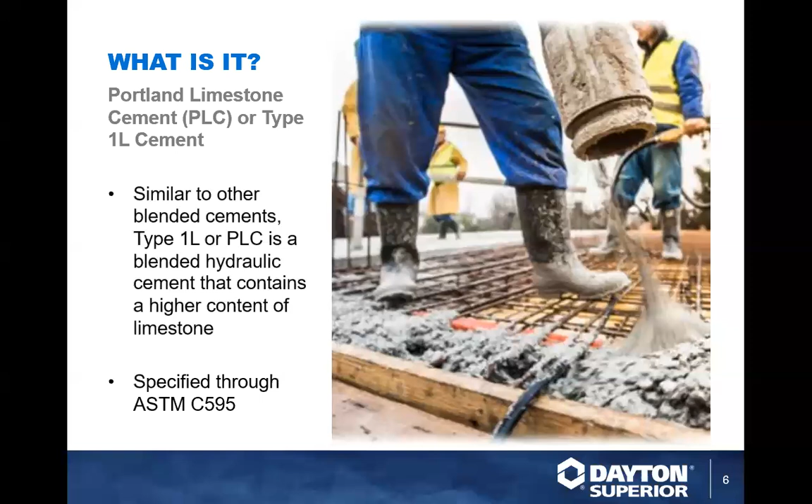As I mentioned, PLC is considered a blended cement, and it's not the only blended cement out there. Regular Portland cement, as specified under ASTM C150, can have up to 5% of the clinker replaced with an SCM, or supplementary cementitious material, that's going to exhibit those cementitious properties. Once we get past that 5% and into a range of up to 15%, we're looking at what's called blended cements. This can include Type 1L if you're using limestone, Type 1S if you're using slag, Type 1P if you're using pozzolan, or Type 1T, which is actually a ternary blend of all of those together.

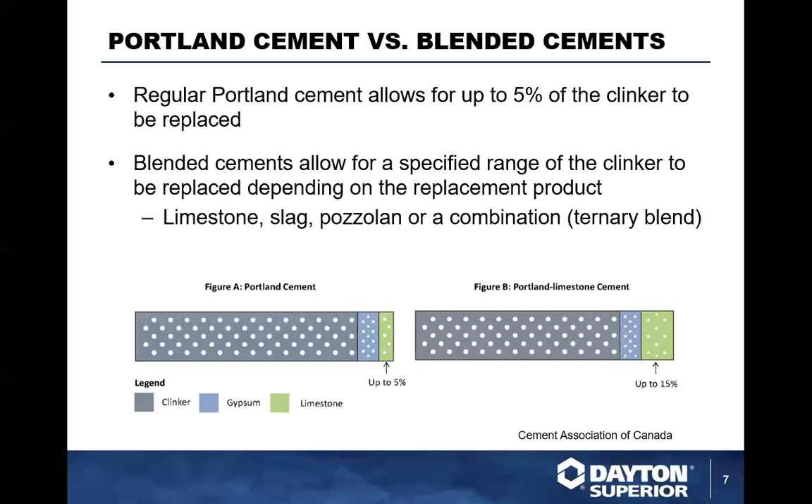So they're going to be defined by the clinker replacement, and that typical replacement range, at least for PLC, is anywhere from 5 to 15%. Generally, you're going to see 8 to 15%. So in that figure, you can see that the gypsum in the middle, the blue, is the same size. You're replacing that gray clinker with some more of that green limestone.

One of the biggest questions everyone is asking is why? Why are we being forced, quote unquote, to use Type 1L? So the main reason is how much better it is for the environment. By replacing Type 1-2 with Type 1L, we can generally reduce the carbon footprint of our concrete production by about 10%. So by using PLC, we're lowering the carbon dioxide emissions anywhere from 8 to 12%, so that 10% is the average per ton of cement produced, which over time can actually really greatly impact our global warming potential.

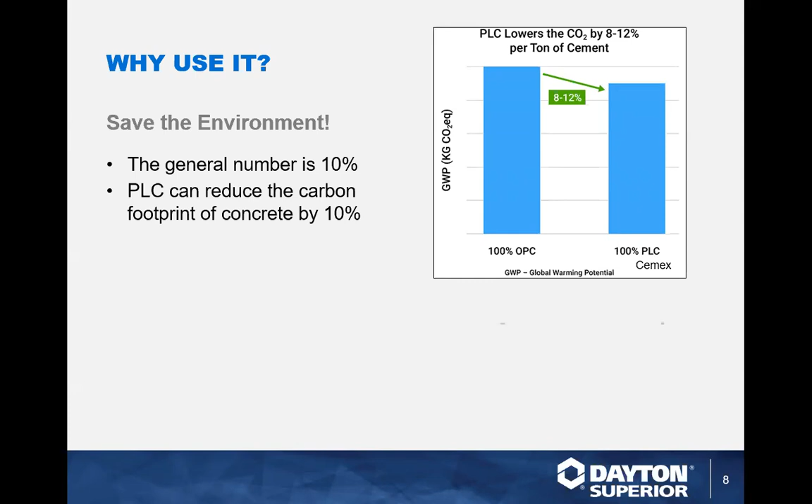Another reason for using Type 1L is that it's already globally used and accepted. It was adopted in Germany as early as 1965, and it's since spread across Europe and Canada. As you can see on the graphic, the entire US has accepted the use of Type 1L as of February 2024. This graph has slowly transitioned to all green as of this year. But just because the country has accepted it doesn't mean it's been an easy transition.

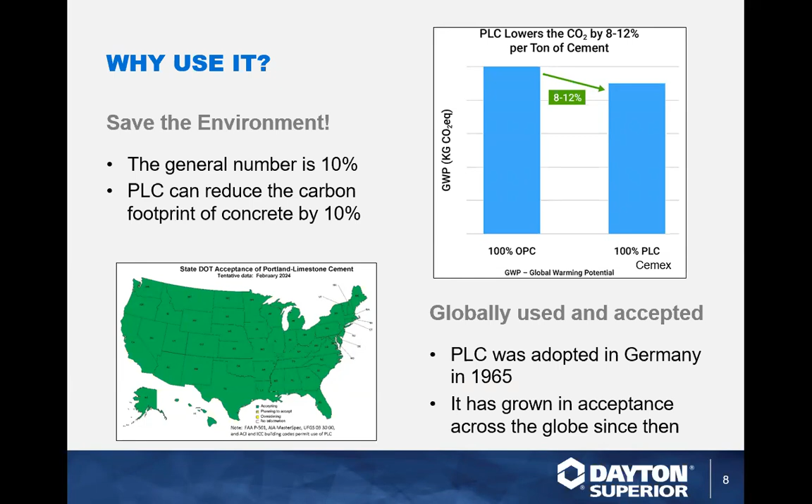So there have been various surveys conducted by multiple outfits on how users feel about Portland limestone cement and how it's affecting or not affecting their work. So why are we seeing that some crews are facing issues and others aren't?

First and foremost, not all PLC is created equally, which is a little scary. The limestone content can vary anywhere from 5 to 15%. The fineness of it can also differ based on how that manufacturer is going to grind that limestone down. And some mixtures actually contain admixtures or varying types of aggregate. All of that can change what you're seeing out in the field.

Some manufacturers are also a little bit more experienced. So if you've got a decorative crew, they're used to working with a variety of different batches, working with lots of SCMs, changes in batches, anything like that. So if you have a change from batch to batch, or you're just changing to Type 1L in general, these decorative crews that are used to using those different admixtures and aggregates are going to have less struggle when they're adjusting on the job.

Lastly, curing really does matter. It's extremely crucial to follow proper curing guidelines. Over time, we get comfortable in our jobs. We realize when certain things might be slipping that we need to tighten up on. So when working with PLC, it's important that the crews tighten up their curing techniques and closely follow the guidelines set by ACI for proper curing.

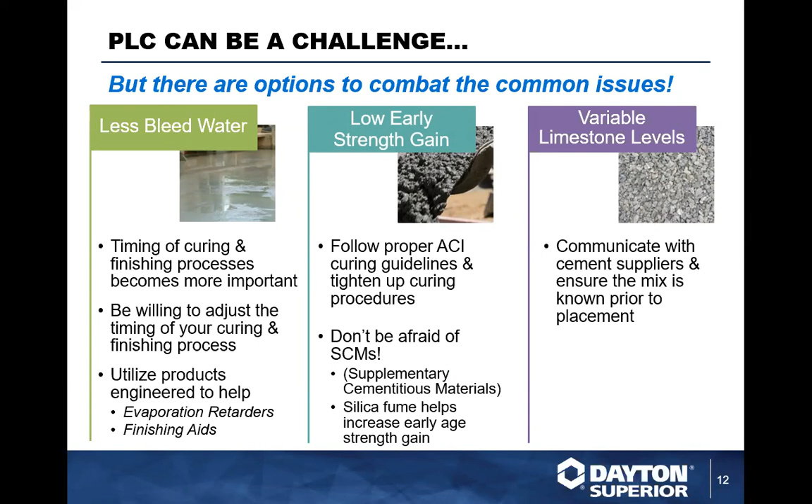Lastly, if you think you're getting variable limestone levels in your batches and no two batches are acting the same, you're seeing some really funky things on your job site, then try upping your communication with the cement supplier to ensure you know what mixes you're working with. There are consistent suppliers out there. Don't be hesitant to look - maybe there's someone else out there that you can get better, more consistent batches from. This also varies regionally. Different suppliers across the country are coming back with different mixes, so we're seeing a lot of variation across the country as a whole.

So it's possible by now you guys are sick of hearing about these magic chemicals meant to solve all your type 1L problems. Dayton talks about it, lots of people in the industry are talking about it. Well, I can't guarantee that they're magical, even though I think chemistry is magical, or that they'll solve all your problems. They can't hurt to try them. So we're going to talk a little bit about them today and how they can help.

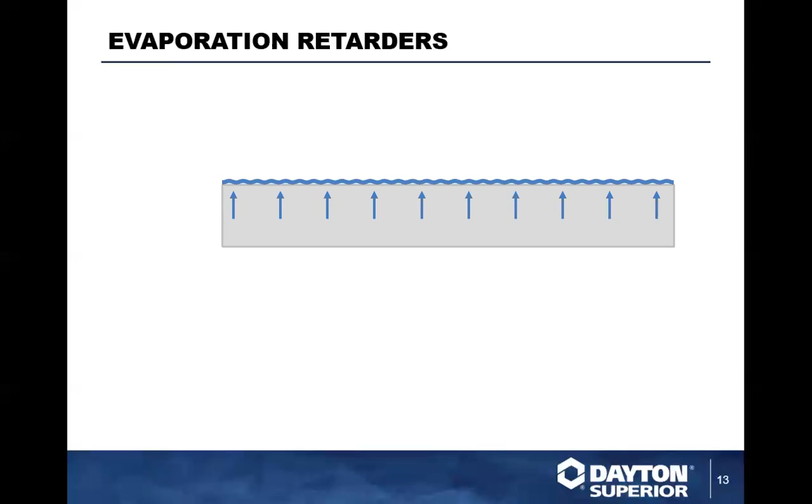The first product you can try to help maintain your bleed water is an evaporation retarder. So you're starting your job, you've got your concrete slab poured, and as everything's setting up, your bleed water is coming up to the surface. After your screeding process is complete, you're going to spray down your evaporation retarder. It's available in both a concentrate and ready to use. One of ours is yellow, hence the probably really difficult to see yellow on the screen.

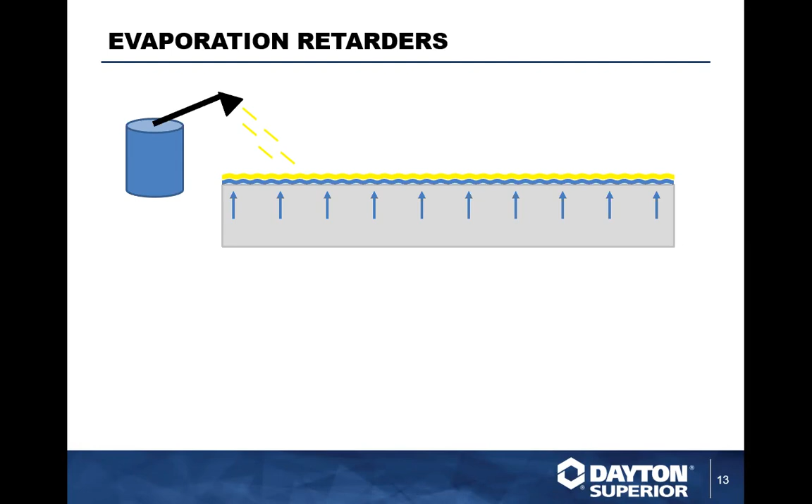The product's going to contain a long chain chemical, designed to form a water-insoluble waxy film. That long chain means it's forming that film without any space in between. That film is going to trap the bleed water on the surface, as you can see in the little picture. It's going to lock in that moisture, and allow the time you need to finish your slab before going back to finish it.

So if you're working with a huge slab, the weather conditions are pretty rough, and you're looking to keep as much bleed water as possible, which we know might be a little bit less with type 1L, you spray this evaporation retarder down as you're going through your slab. And as you come to finishing the end of your slab, by the time you're ready to actually start the finishing process, that film has kept that moisture in there.

So make sure that you're not working this into the surface. It's really important that you just spray it and leave it to do its job. Because the product does contain water, whether you're using ready to use or mixing the concentrate with water, if you work this into the surface, it's going to add water to your mix. That's going to change your water to cement ratio, which gives you a whole different slew of problems. We're already very sensitive with our water cement ratio with type 1L, so simply spray it on and leave it to do its job. Easy peasy.

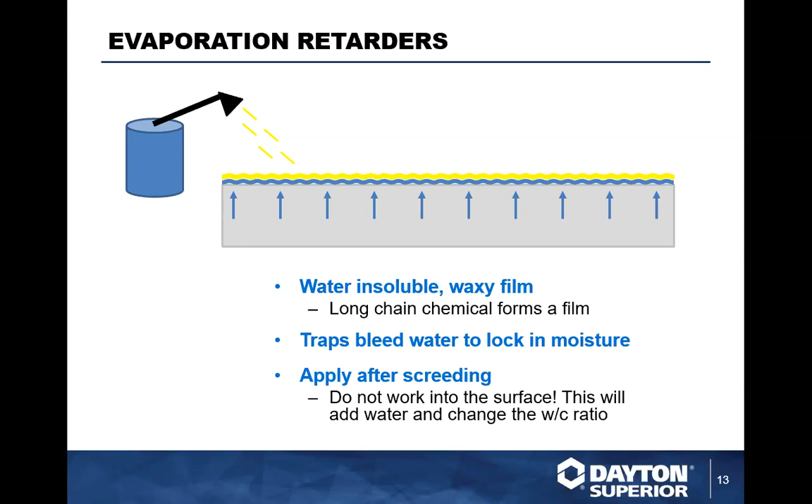Another option we have is to use a finishing aid during the floating and troweling step. As I mentioned, the evaporation retarder is after the screeding process; the finishing aid is during floating and troweling. Most finishing aids contain colloidal silica, which aids in cement hydration. So same as before, you have your concrete slab, which contains water and calcium hydroxide. You're going to spray that colloidal silica finishing aid on the surface of your concrete.

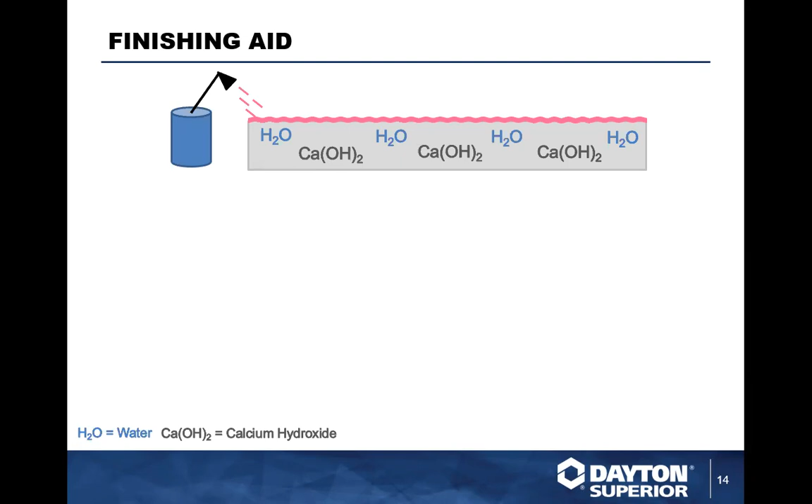This is where it starts to get a little different. After you spray that on, you're going to take your trowel, and this time work the product into the surface to ensure the silica mixes into the water and the calcium hydroxide in the slab. As that trowel goes across and mixes it into the surface, that silica is getting down into there, and after some fun chemistry, it's going to create calcium silica hydrate. So after that silica is worked into the slab, it reacts with the calcium hydroxide in what's called a pozzolanic reaction to form that CSH.

The CSH actually reduces your pore size and increases your strength. So if you remember when we talked about lower strength gain, one of the SCMs you can use to help with that is silica fume. It's similar here, where this colloidal silica helps fill in those pores by reacting and forming that calcium silica hydrate. It increases that strength. It can be great, but don't overuse your silica.

The finishing aid is also going to slow the evaporation. You can see it's kind of trapping that water in a little bit. It's not going to form a film, but it will slow it a little bit and therefore increase that pasty cream on the surface that allows for a nice smooth finish. So as you're working through your slab and you're seeing some tears and cracks as you're troweling over, you might want to consider adding finishing aid to keep that pasty cream up there to allow that process to happen without those tears.

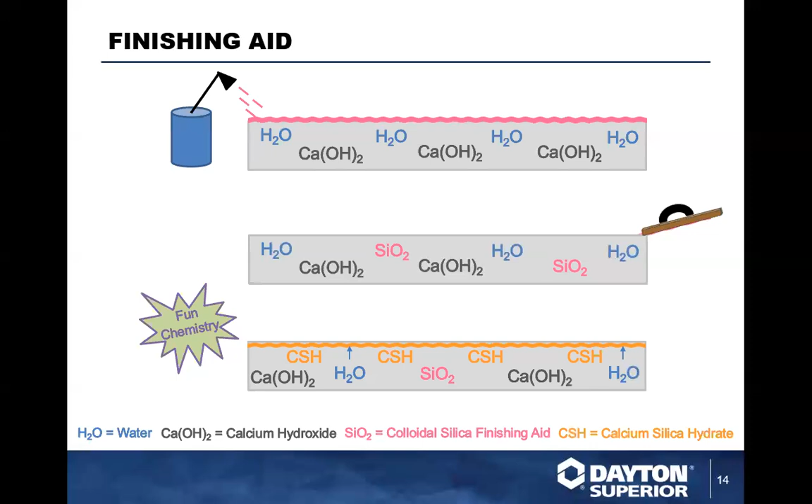So to finish up, we're going to do a little bit of comparison. The evaporation retarder utilizes what's called cetyl alcohol to get that water insoluble film. So when it's sprayed on the surface of your slab after that screeding process, it's locking in the moisture, trapping the bleed water, and extending the time you have to finish your slab overall.

Then you have your colloidal silica finishing aid that gets troweled into your surface of your slab during the smoothing, like the finishing troweling process, to create more of that CSH for a smoother finish and less cracking.

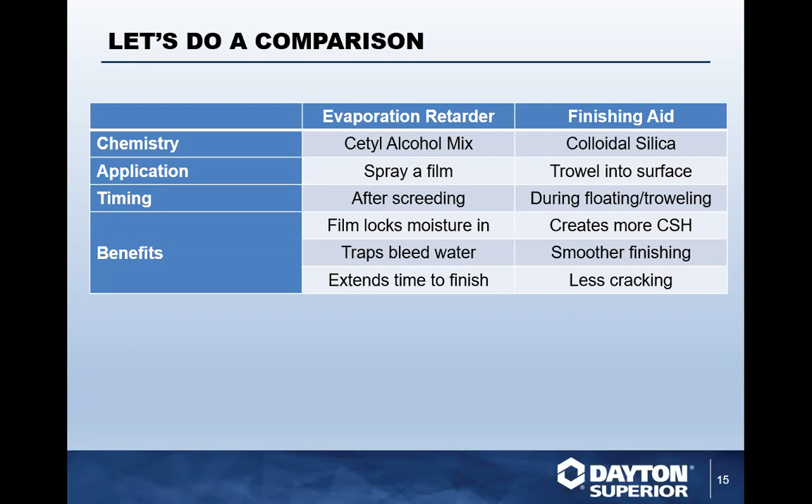As a note, you can use both products on the job because they're used at different points in the process. So in this case, after your screeding, you put down your evaporation retarder. Then when you go through to do your floating and troweling, you can use that finishing aid to create that paste, make it a smoother finishing process, and end up with less cracking. So together, they're kind of like a little powerhouse duo of chemical products that will be able to help you on these type 1L jobs.

There's lots of other ways that you can get better performance out of type 1L, whether it's using SCMs, or tightening up on some of your processes that we might have gotten a little lax with over the years as we get super comfortable with type 1, 2, or type 3. But there's lots of different options.

We'll be having some more information eventually about chemicals and type 1L in general. So how is type 1L reacting with different chemicals, whether it's bond breakers, curing agents? How does it look as we've mixed it into all of our powder products? We have incorporated type 1L into all of our repair mortars and grouts. It's something that's definitely taking over the industry. But it's a good challenge, and it's how we grow as an industry.

So on top of that, we also have plenty of other resources that Heidi's going to go through for you.

It's my turn. Your turn.

Holly, great job. I love the animations that you did. That really helped me.

We have guide documents. In this case, we have a guide to evaporation retarders that you can see what that means, what would be the best one for your project. Handbooks, the chemical handbook, technical and safety data sheets to show you how to use the product safely, effectively and correctly. In addition, we have done third-party testing and we have certificates of compliance.